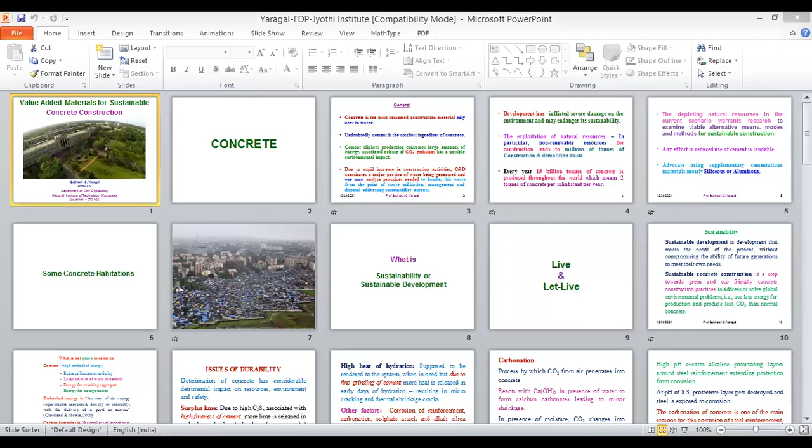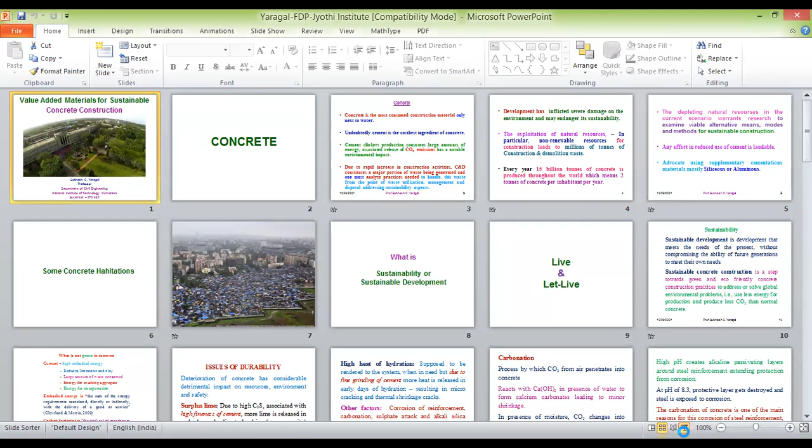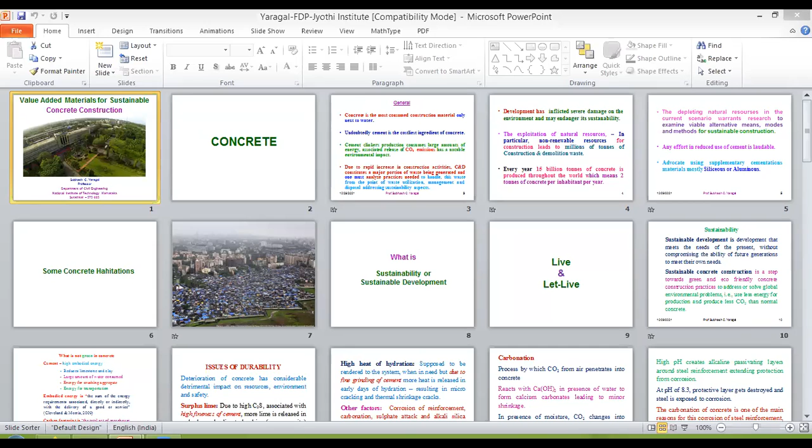Is that fine now? Is it okay now? No, sir, I think you have to click on this small icon for full screen slideshow. It's just beside 100%, in the bottom right corner. Just click on the slideshow. The fourth icon, sir. Not yet, sir. One minute. Should I give this new share? Yeah, sir, I think it's better if you share the whole screen rather than the PPT window. You can stop sharing and share again with your whole laptop window. Yeah, one minute.

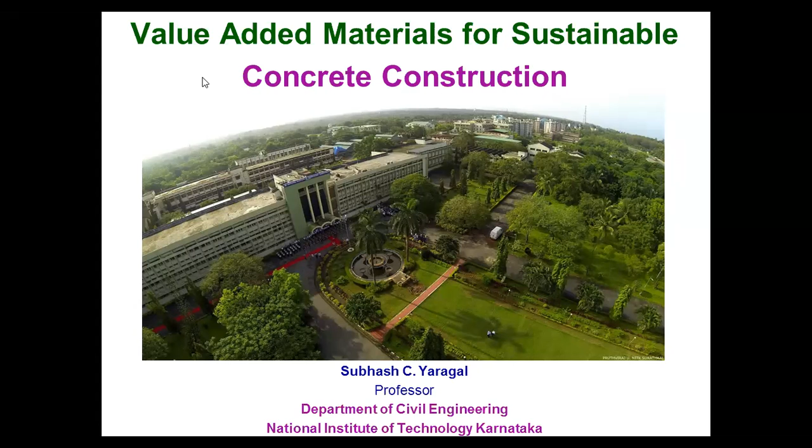Is it coming now? Hello? Sir, it's good to go. It's fine now? Yes, sir. Please go ahead, sir. Thank you. Sorry for the glitch that we had. No problem, sir.

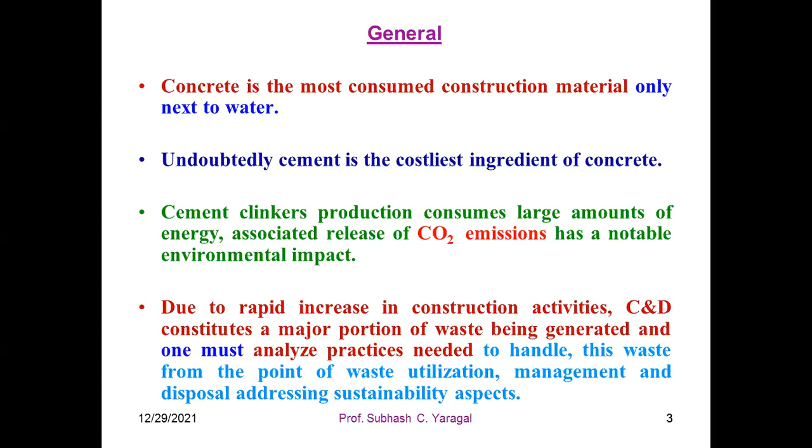There is no doubt that development has inflicted severe damage on the environment, and therefore we fear that it may endanger sustainability. Sustainability is in question, and therefore today's topic has a lot of significance: how to make concrete construction sustainable, so that future generations will also have adequate resources to enjoy to the extent that the current generations are enjoying. That is the theme of my presentation.

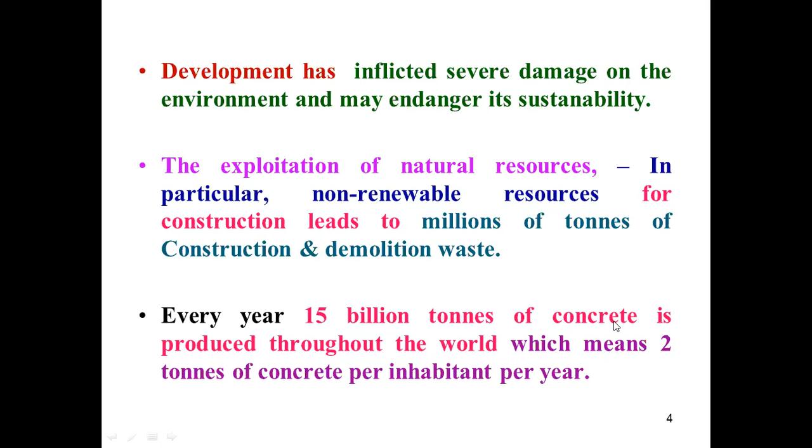The exploitation of natural resources, in particular non-renewable resources for construction, has led to millions of tons of construction and demolition waste. We have generated a lot of C&D waste. This statistic is very important. Every year, 15 billion tons of concrete is produced throughout the world, which on average means 2 tons of concrete per person per year. So you and I are producing around 2000 kg per year. That is not C&D waste; it is the per capita concrete generated, which is not a small amount.

Now, the depleting natural resources in the current scenario warrants or is the need of the hour to do research to examine what are the viable or feasible alternative means, modes and methods for sustainable construction. So warrants means it is a serious requirement today so as to address sustainable construction.

Therefore, any effort in reduced use of cement is very appreciable. We normally, to do this, advocate or preach to use more supplementary cementitious materials, which could be siliceous or aluminous.

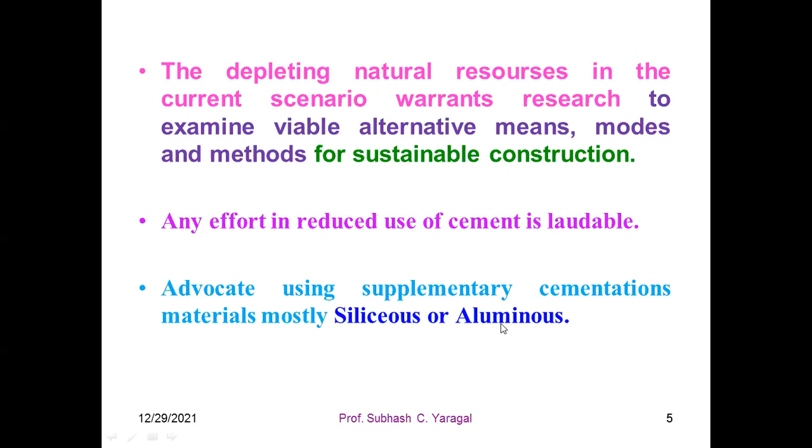So if you look at some concrete habitations all over the world, this is a photograph from Mumbai, close to the Mumbai airport. We are having a concrete jungle. Here also people dwell and live, as the richer class of people are living in multi-story buildings.

So why I have taken this slide is just to show that sustainability is all of us should have the same living standards, but it is not so for whatever reasons. So there is a gap between the rich and the poor. In the years to come, this gap has to be reduced.

What is sustainability or sustainable development? Very simple. Father of the nation, Mahatma Gandhi said, live and let live. Already I said, if your future generations have ample resources to enjoy the life that the current generations are having, that means we are living our lives and also allowing the future generations to live. So the simple definition of sustainability is you also live and allow others also to live.

I'm just coming to the core of my presentation. We'll just see what sustainability is and what is sustainable concrete construction.

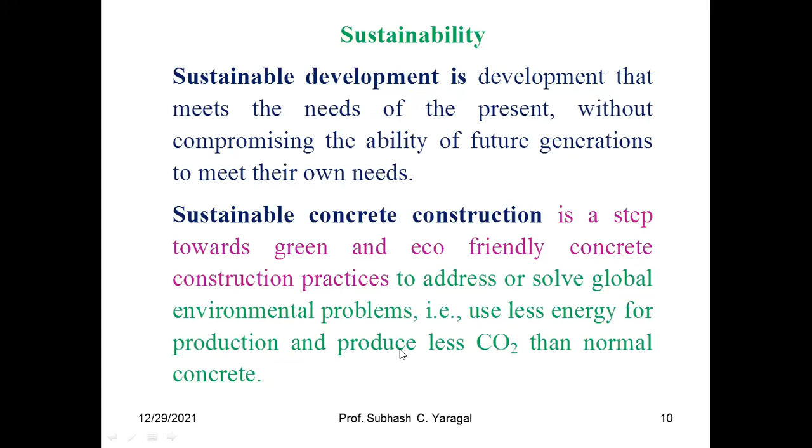If you ask me what is not green in concrete, the first culprit happens to be the cement. And cement is a binder for the constituents of concrete. So it itself is not a green one.

Why? Because for cement production, we require high embodied energy. It is a very energy intensive manufacturing process involved to produce cement. There, to produce cement, we are reducing the natural deposits of limestone and clay. A large amount of water is consumed in the manufacture of cement.

Energy is needed for crushing aggregates, because whatever limestone and clay deposits are to be crushed, you consume mechanical and electrical energy. Of course, manufactured cement has to be transported to the place of use, therefore you consume a lot of energy for transporting cement from one place to the other.

We'll define what is embodied energy, because I wrote here high embodied energy, and what is carbon footprint. These are the two buzzwords as regards global climate change and sustainable construction. Embodied energy is the sum of the energy requirements that is associated either directly or indirectly with the delivery of a good, for supply of a good, or it could be a service.

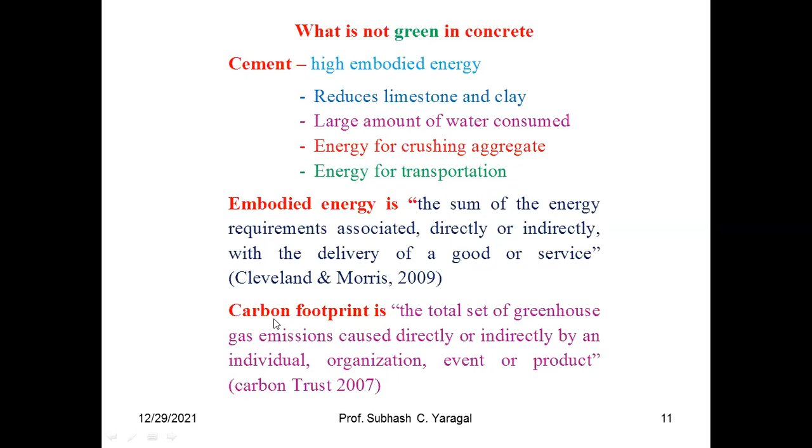Why am I talking about the issues of durability? If your concrete is not going to be durable, it means it calls for replacement sooner and sooner. So our effort should be to increase the durability of our construction material, or make concrete as durable as possible. Now, what are the issues with making it highly durable?

It is the deterioration of concrete. So concrete's quality is deteriorating with time. This has a considerable detrimental impact on resources, because if it gets deteriorated, again you have to make use of the natural resources for producing new concrete.

That calls for threat to the environment, and it is indirectly a threat to the safety of producing resources. Therefore, deterioration in concrete should be reduced so as to increase the durability of concrete. Make your concrete live as long as possible without having any detrimental effect.

We'll see what are the issues related to durability. One is surplus lime. Please understand, due to high C3S, which is associated with high fineness of cement - finer the cement, more is the production of C3S, one of the constituents of hydration of cement - more lime is released in early days, which leads to leaching. Leaching means this lime would like to come out of the body of your concrete. So if this leaches out or tries to come out, it is making the body of concrete more porous, increasing the porosity of the concrete element - structural element could be a beam, column, or slab. So you are making that more porous, and therefore it becomes more prone to external chemical attacks. If your foundation is buried, chemicals in the soil may get into the body of concrete and thereby reduce the durability of concrete. That is my concern due to surplus lime.

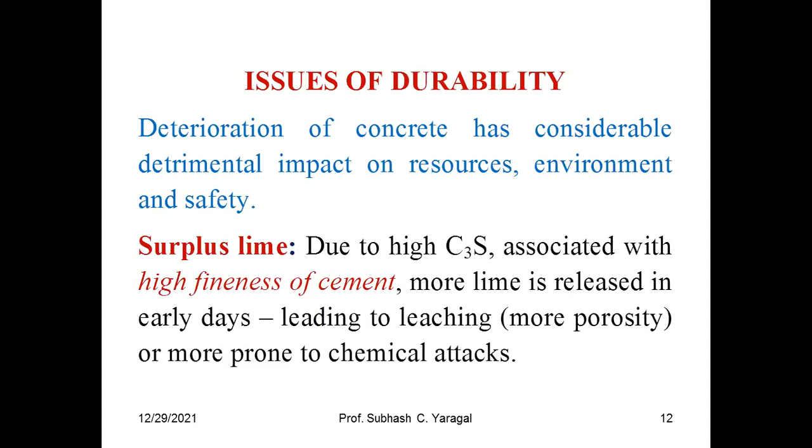We have problem with high heat of hydration, which is supposed to be rendered or delivered to the system when needed. But due to fine grinding of cement, which is the advanced technology for grinding, more heat is released in the early days of hydration. That results in micro cracking and thermal shrinkage cracks. This also has to be duly taken care of so as to increase the durability of concrete.

What are other factors? There are several other factors such as corrosion of reinforcement, carbonation, sulfate attack, and alkali silica reaction in concrete, which are the major issues associated with durability of concrete.

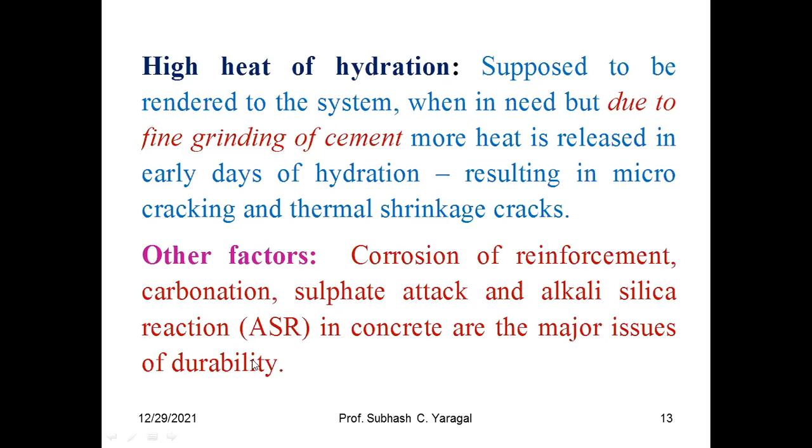Let's quickly see what carbonation is. You must all be familiar with carbonation. This is the process by which carbon dioxide from the air or atmosphere penetrates into the concrete or structural element. That we call carbonation - entry of CO2 from the atmosphere into the body of concrete. Now what does this do? It reacts with calcium hydroxide in the presence of water to form calcium carbonate, leading to minor shrinkage. This is the cause of entry of CO2.

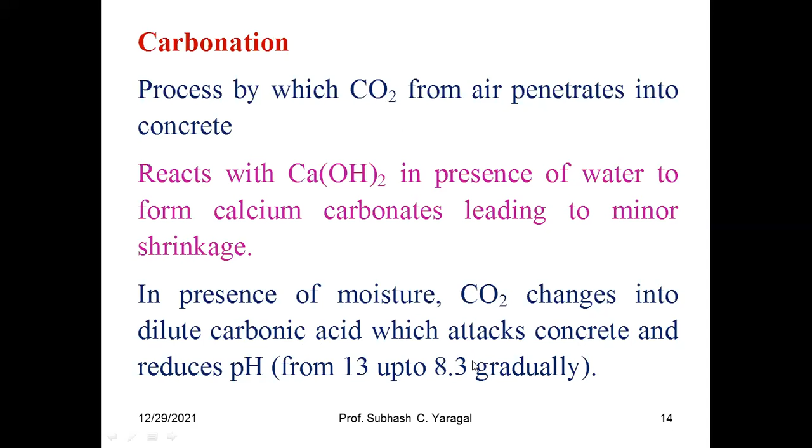In addition to that, in the presence of moisture, CO2 changes into dilute carbonic acid. This is of more concern, as it attacks concrete and reduces the pH from 13 - we want the concrete to be alkaline, up to pH 8.3. Due to this carbonation, the pH is getting reduced, from alkaline environment to acidic side, due to which our durability is again in question.

So high pH creates alkaline passivating layers, which are desired around the steel reinforcement, so that steel does not get corroded, extending protection from corrosion. We want an alkaline environment, but since the pH comes down from 13 to 8.3 due to carbonation, the protective passivating layer gets destroyed and steel is exposed to corrosion. So the chances of steel getting corroded due to carbonation are very high. Carbonation of concrete is one of the main reasons for corrosion of steel reinforcement.

This is particularly severe in high humid conditions like coastal Karnataka, where humidity is 50 to 70%, and in places like Mangalore and Surathkal, humidity is to the extent of 95%. So if we are not very careful in checking the effect of carbonation, the structural steel will deteriorate very quickly, and the structure may be in distress, manifested by cracks, and we may have to do early retrofitting or rehabilitation of the structure.

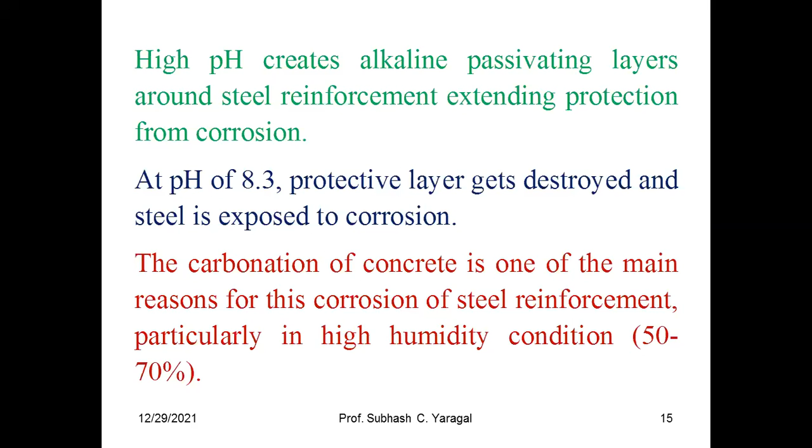What are the issues, concerns, and ways forward? Having understood the problem with making concrete durable, and also how to reduce the consumption of cement, which is the only constituent in concrete that is not green.

Now, global effort towards sustainability - a lot of effort has gone in, starting from the year 2007, issued by the International Panel on Climate Change, which has stated in no uncertain terms that global warming is no longer an issue to be debated. IPCC said that we are having global warming, we are not going to debate on that. Since global warming is here, drastic actions are needed for long-term sustainability of our environment.

So what we understood, or what the International Panel on Climate Change agreed, is there is global warming and we have to act swiftly, or very drastic actions are required if we are addressing the problem of long-term sustainability. If you do not want sustainable construction, you need not bother, okay, and your future generations are at stake and they may suffer.

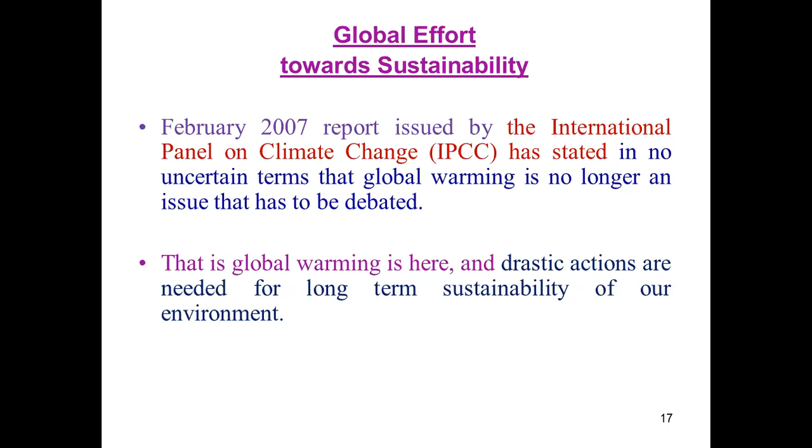Now, as per this International Panel on Climate Change, it consisted of 600 scientists from 40 countries. The global warming is here and is due to human activity and is irreversible. It is due to us and it cannot be repaired. But it can be reduced. It recommends drastic steps to reduce CO2 emissions, which is the primary source of global warming.

We'll talk about greenhouse gas emissions. It is not only carbon dioxide. Other greenhouse gases are also there. I'll address that.

If no actions are taken to curb or reduce CO2 emissions, it is likely that the Earth's average temperature could increase by 4 degrees by the end of this century. So please remember, a 4-degree rise calls for very serious attention. Temperature rise of 4 degrees C over this century and above, if it can be more than this, would have serious impacts on food production, water availability, and extreme weather events worldwide.

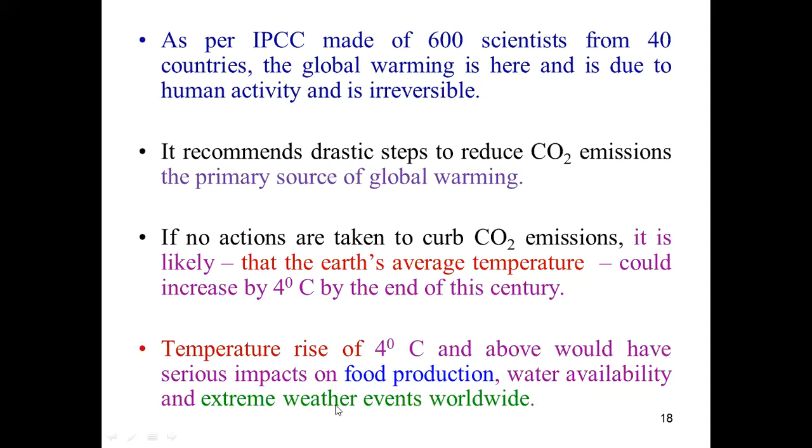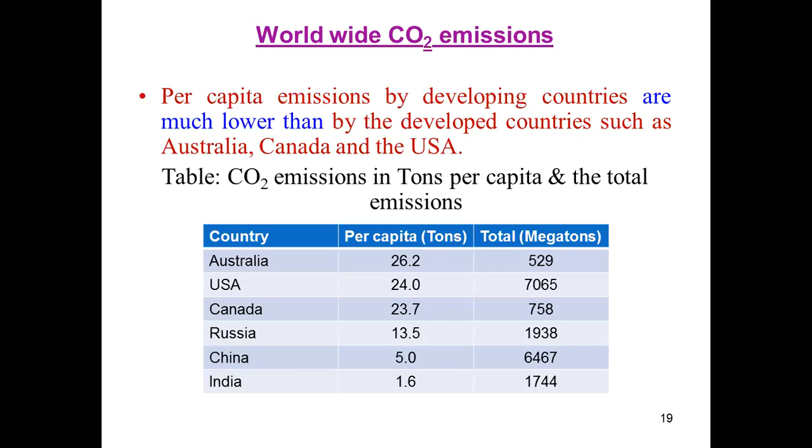Now, worldwide CO2 emissions per capita in developing countries are much lower than the developed countries such as Australia, Canada, and US. Okay, this is the data for your information. I'll share this PowerPoint presentation, and you can go through these details.

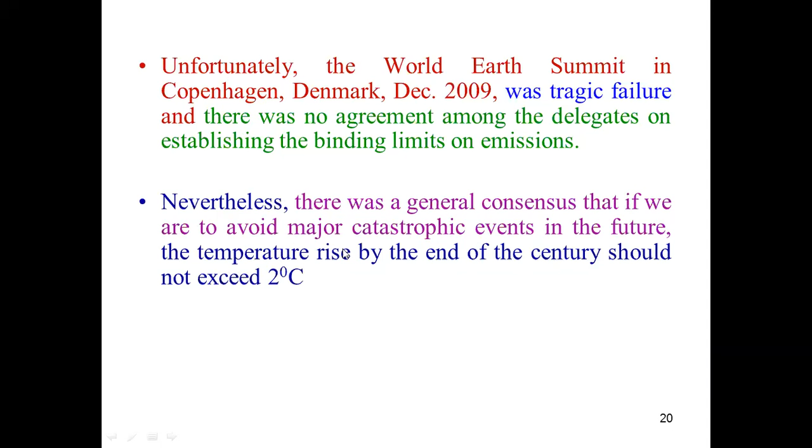Now, unfortunately, the World Earth Summit in Denmark in the year 2009 was again a tragic failure, and there was no agreement among the delegates or the participating countries on establishing binding limits on CO2 emissions. However, nevertheless, there was a general consensus that if we are to avoid major catastrophic events in the future, the temperature rise by the end of the century should be contained or should not exceed 2 degrees C. So this was the understanding in 2009.

Now, CO2 emissions by automobiles in USA. Cars are the largest single source of emissions into the atmosphere, and every liter of gasoline burned produces about 2.5 kg of CO2. The average car getting 10.6 kilometers per liter and traveling 20,000 kilometers per year emits about 4.7 tons or 4,700 kgs of carbon dioxide. Just to give you a feel, one car which runs 20,000 km per year with this mileage is giving you around 5,000 kg of CO2 into the atmosphere, just to give you a feel.

Now, CO2 emissions and tropical deforestation. So this also is a worry for us. This is the second biggest cause for global climate change, deforestation, second only to burning of fossil fuels. Now, because of deforestation, Indonesia and Brazil rank third and fourth in the world in greenhouse gas emissions. Of course, first and second are China, which is highest in these greenhouse gas emissions, and America.

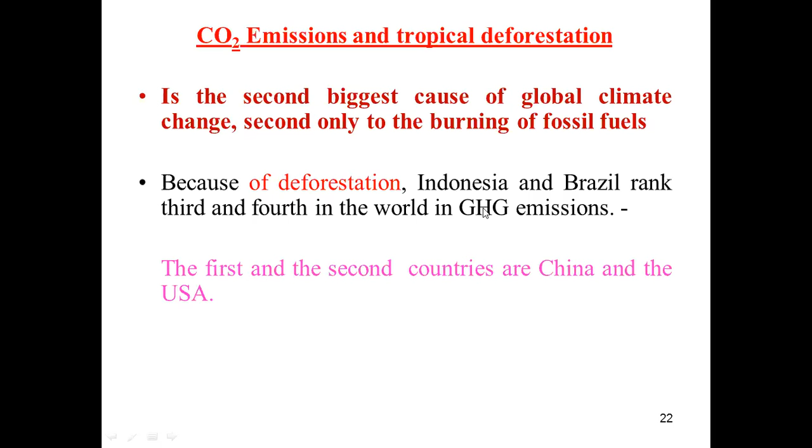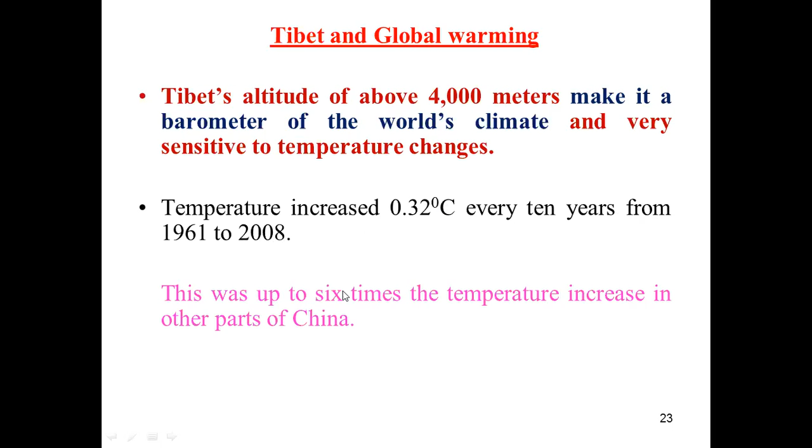Now, the importance of Tibet as regards to global warming. Tibet's altitude is around 4,000 meters above mean sea level, and it is called the barometer of the world's climate. So Tibet is very sensitive to this global warming, okay, and is sensitive to temperature changes. The temperature has increased 0.32 degrees every 10 years. That means in 30 years, it is close to 1 degree C, from the year 1961 to 2008. So this was up to 6 times the temperature increase in other parts of China. So elsewhere, it is almost 6 times.

So what? We are going to pay a heavy price, the likely outcome of climate change. Global warming is going to bring in climate change. Now, because of this, we are paying the price for the following: disappearance of glaciers, okay, that means glaciers are melting very fast, melting of the Antarctic glaciers, and melting of the permafrost in the north.

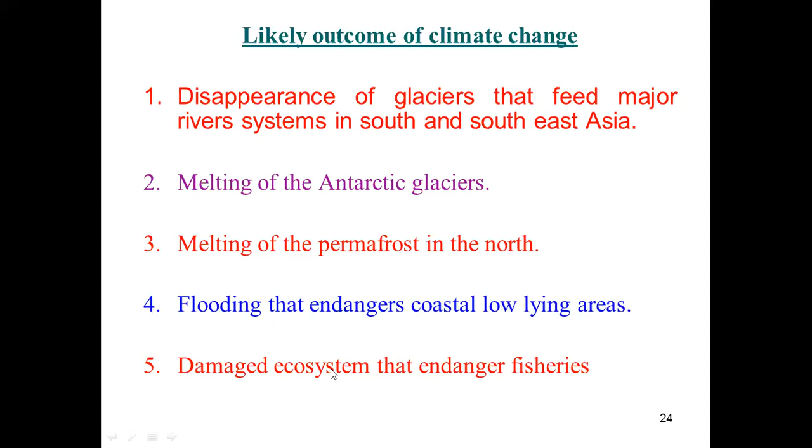Due to disappearance of glaciers, we may have flooding that endangers the coastal low-lying areas. So if the water, because of the sea level rise, starts to come inland, all the low-lying area people have to get inland. Okay, so you will have flooding. You are having damaged ecosystem that may endanger fisheries. So fisheries is our food production. So if you damage the ecosystem, your food production has a direct impact.

You may have danger of very serious air pollution. We are seeing this now. We have not really understood, but because of the global warming, you are having climate change. Because of climate change, you have danger of serious air pollution. You may have increased danger of insect-borne diseases. Not clear about, but you are likely to get this.

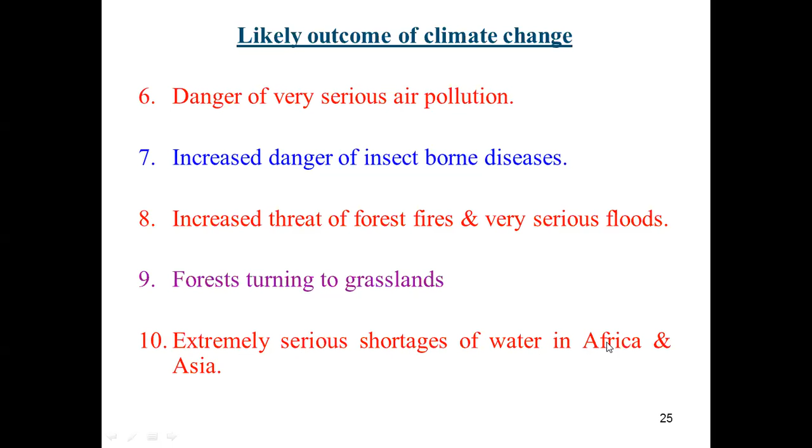You will have increased threat of forest fires and very serious floods. Forests turning to grasslands, that is, fertile land becoming barren land. Extremely serious shortages of water in both Africa and Asia. Already we are experiencing this.

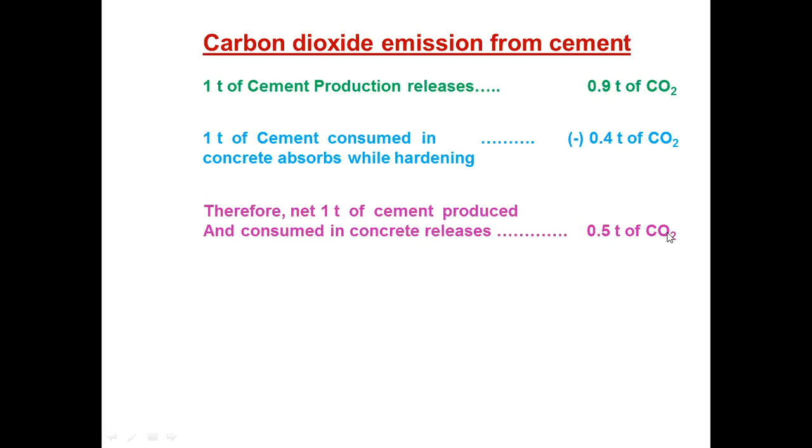Okay. Again, I'm coming back to CO2 emissions in the manufacture of cement. 1 ton or 1000 kg of cement production releases 900 kg of CO2. We have a rough understanding that the concrete itself is going to absorb back, while it is hardening, about 400 kg of CO2 back into its body. So net, if you produce 1 ton or 1000 kg of cement, at least you are responsible that you are letting off 500 kg of CO2 into the atmosphere, just to remember.

Enormous emission of CO2 into the atmosphere, along with minor amount of nitrogen oxides, we say NOx, and methane. These are also deadly. Now, NOx, oxides of nitrogen, and methane, though they are small, are much more damaging than carbon dioxide. So all this time we are talking about only CO2. So greenhouse gas will also have these.

So I have just given the relative damage indices for various greenhouse gases. If you consider CO2 damage as 1, methane is 20 times dangerous than carbon dioxide. Nitrous oxide is 200 times dangerous than carbon dioxide. And fluorine, though small, is 15,000 times damaging than CO2. Of course, CO2 we are producing in large amounts.

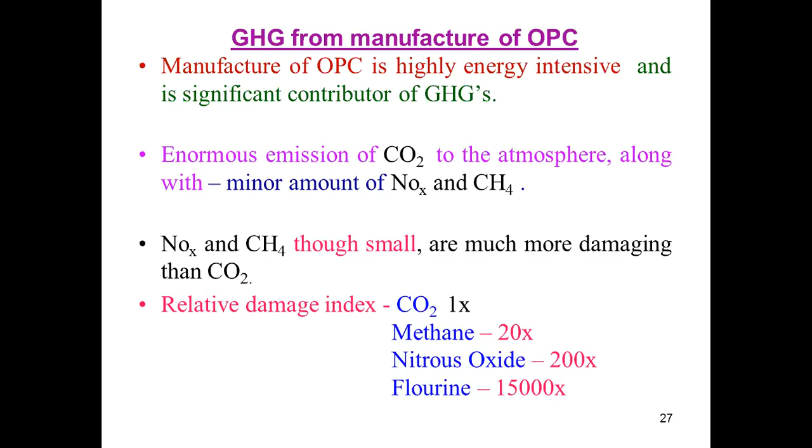After that, to address sustainability, the other constituent which is so vital for existence of all living organisms, including human beings, is water. So water will be the next world's crisis. Okay, we'll run short of water. Now, water shortage again has an implication on global warming. Himalayan glaciers are melting fast. Glaciers are retreating by about 10 to 15 meters each year, not a small melting.

This is on one hand. On the other hand, there are a lot of luxuries. We are wasting a lot of water, to the tune of 9.5 billion liters of water currently being used for irrigating world's golf courses. So golf is itself a luxury and you are consuming large volumes of water.

Irrigation, we are paying a lot of price because our conveyance, our irrigating canals, are not efficient enough. So efficiency of water transport from the dam site to irrigate fields is only to the tune of 50 to 60%. That means during transportation of this irrigation water, we are losing about 40 to 50% of the water. Water table is very fast declining because you are over exploiting the groundwater. There are no well set drafting laws in place.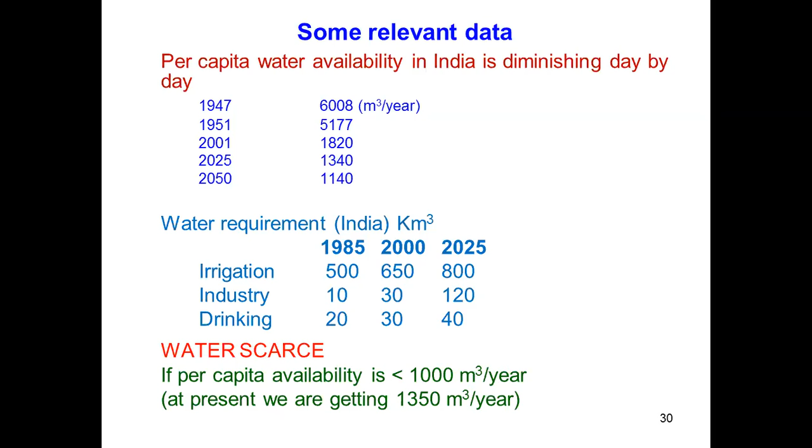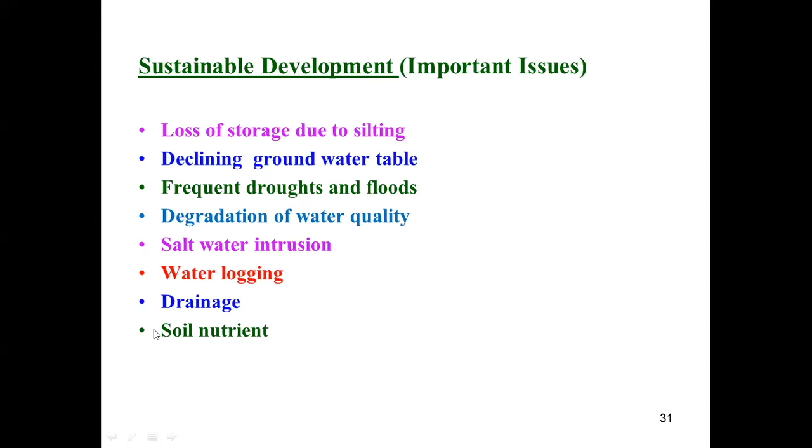You may have waterlogging if drainage conditions are not properly maintained. So drainage has to be addressed. Soil nutrients are lost, again, if there is no proper drainage. What are remedial measures? Very important. I'll just touch upon them. These are all not new to all of you who are listening to me now.

Conjunctive use of both surface water and groundwater. So you strike a compromise, how much of the surface water you are going to use and how much of groundwater you are going to have. Most of you who have bore wells, the government or the state authorities or the local bodies never tell you how many liters of water you have to pump out for irrigation or drinking. So there are no rules, and therefore groundwater is being exploited.

Therefore, you must have an effective draft operation policy. Government should bring in a policy depending on the need, how much of the groundwater I can pump out per day or weekly basis, whatever it is. So you have to go for a judicious use of both surface water and groundwater by having a draft operation policy. Try to improve the irrigation efficiency, because in transporting irrigation water, water is lost on the way.

Try to restore minor tanks and ponds. Government has already initiated this, it has to be encouraged. Interlinking of rivers if possible. Recycle and reuse the materials, which I'm now talking about at least as regards concrete. Demand management has to be done. If there is a need, then you have to supply. If there is no need, then you need not supply. Rainwater harvesting is the answer. Interbasin transfer, if it is viable and feasible.

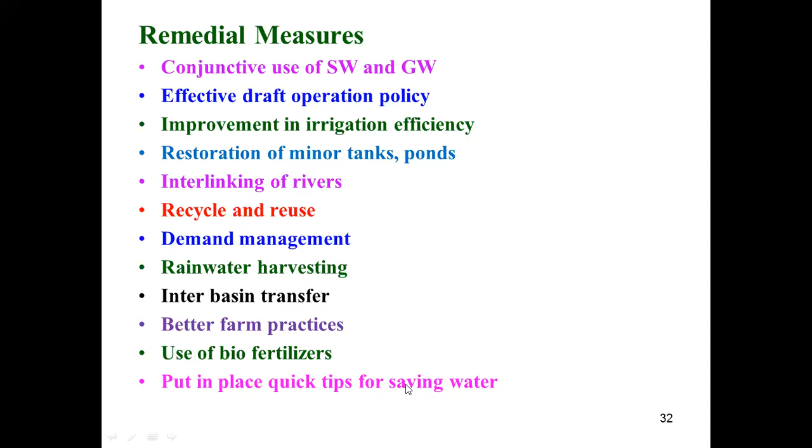Go for better farming practices. Most of our agriculture activities can be mechanized, efficiency can be increased. Use biofertilizers. Organic farming has come into the picture, it has to be increased. Put in place quick tips for saving water. All of us as individuals can save water, which is very precious. If we don't act today, our children and grandchildren in the years to come will suffer because of our misconduct. So consume only as much as required.

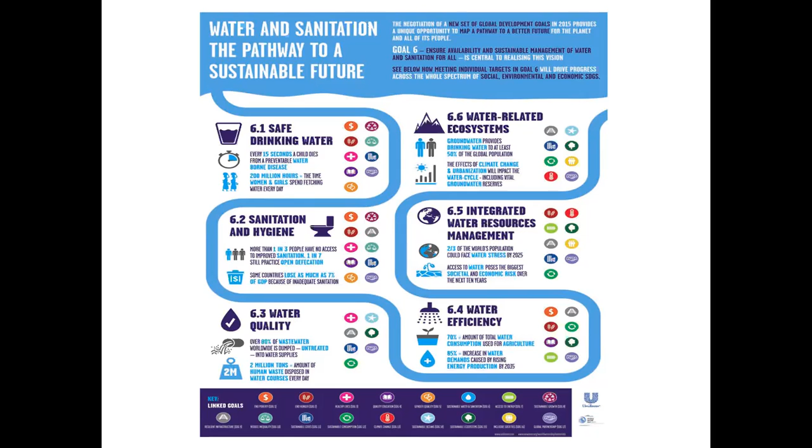Now the efforts from the United Nations organization: they celebrated 2005 to 2015 as the water decade. What they have done is, water and sanitation is the pathway to a sustainable future. From this document, I have taken one slide. This is an 800-page document because the efforts of 10 years have gone into this text. It addresses safe drinking water. So this is the gist I'm talking about. It talks about sanitation and hygiene, cleanliness, water quality, water efficiency, integrated water resources management, water related ecosystems. So this is what the United Nations organization has done from 2005 to 2015. They have celebrated these 10 years as the water decade.

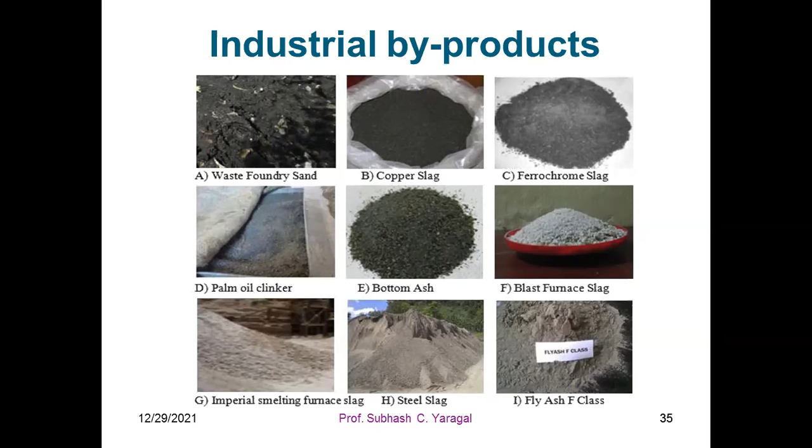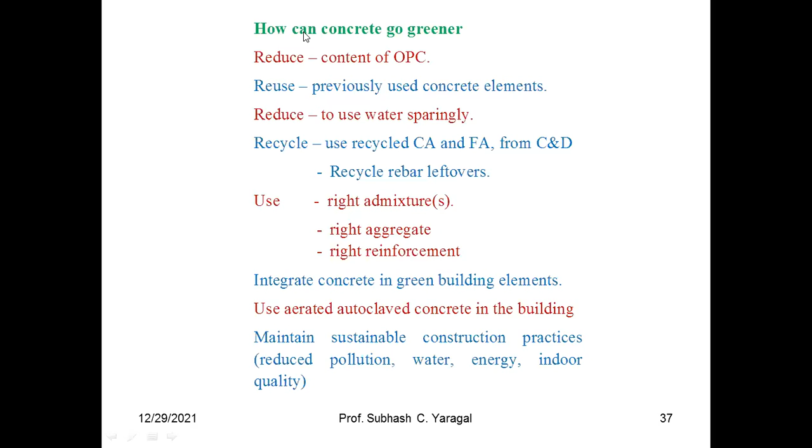What is the way ahead? How can we make concrete go greener, or more eco-friendly? We have to reduce the content of OPC in production of concrete. The lesser the OPC consumed, the greener you are making concrete. Try to reuse previously used structural elements. That means your construction and demolition waste has to be reprocessed and reused to the extent possible.

Reduce consumption of water because it is very precious, and use water sparingly whenever required. Try to recycle: use recycled coarse aggregates and fine aggregate from construction and demolition waste. Again, try to recycle the rebar leftovers, whatever is left out, please try to recycle.

Make use of right admixtures. We have a lot of construction chemicals for increasing the performance of concrete. So go for right use of admixtures and right aggregates, because the right aggregates will give you good concrete, and good concrete will become more durable. Similarly, right type of reinforcement will increase the life of the structural element, and therefore your concrete element will last longer.

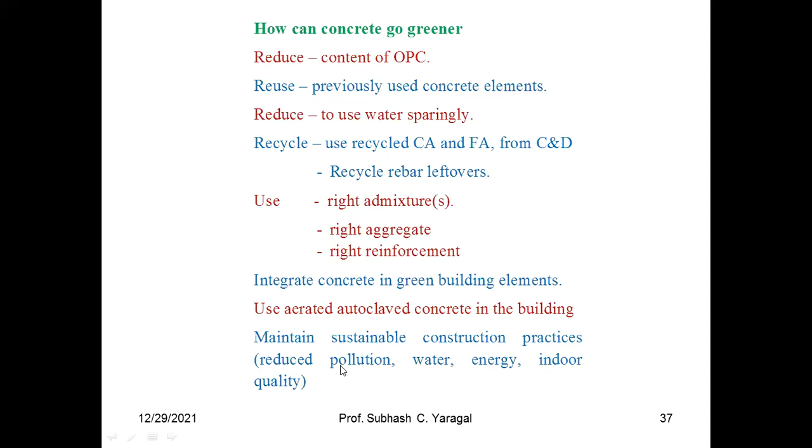So we are talking about blended cements because we have produced Portland pozzolanic cement, Portland slag cement, and Bureau of Indian Standards has come out with composite cements where you have both fly ash and also granulated slag. Both are industrial byproducts. They are no more waste, but they are both value adding to the clinker. So you are only consuming less of the clinker deposit, whereas bringing in these two along with gypsum to delay the setting times. So this is a recommended composite cement, which at least to the tune of 85, if you look at the upper limit, we are getting rid of our normal OPC for concrete production, for cement production.

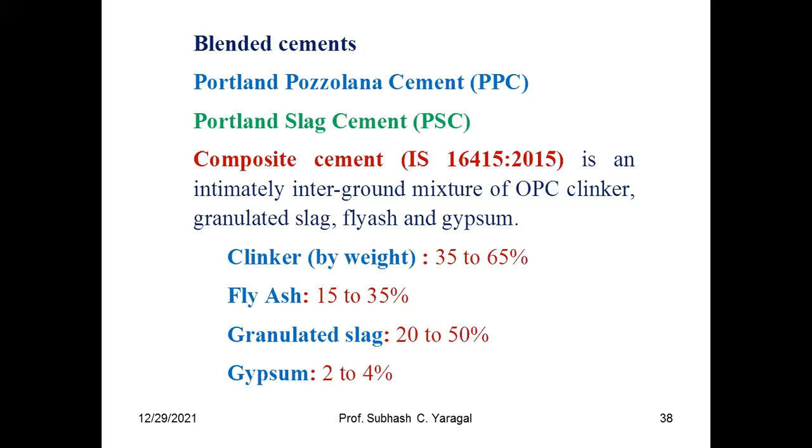Now, production of coal ash bricks also as building blocks has been in place and should be encouraged. Innovative concrete products. So this is from Master Plannery, a place near Puttur in Mangalore. So these all look like wooden fencing, but they are all concrete wood. You have concrete benches, garden terracing, and all these are available. So these are products which have to be encouraged.

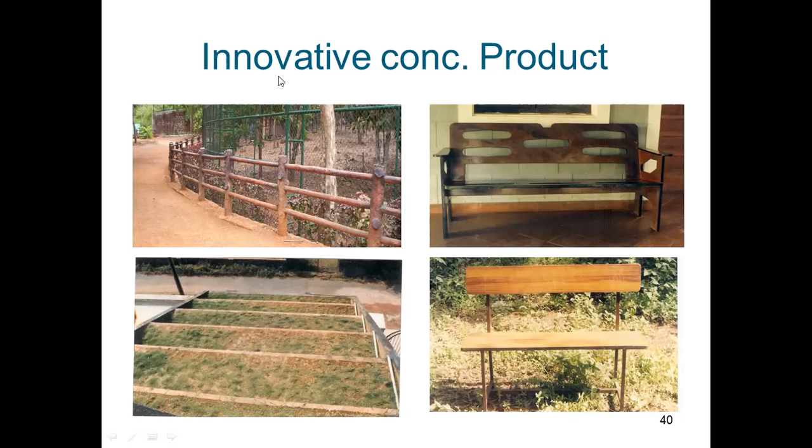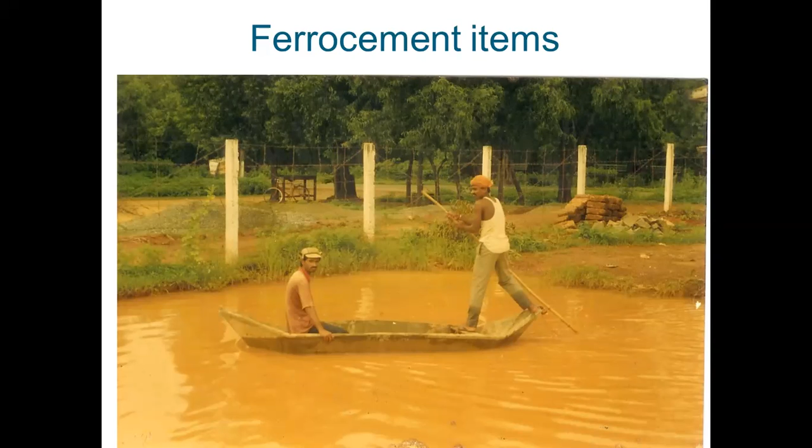This is a ferrocement boat, which was made in NITK Surathkal in the year 1980. What is the beauty of ferrocement products? Ferrocement items are going to last longer in the years to come. So we should encourage them, because you just simply take chicken wire mesh and make use of rich cement mortar. So you get very light and very strong structural elements made out of ferrocement. We have not exploited ferrocement. I think in the years to come, your precast ferrocement structural elements have to be popularized.

Some research efforts I would like to address here. We have gone for lateritic sand. We have done characterization, because a lot of laterite blocks are being used in coastal Karnataka, where we have large deposits of lateritic sand. During the manufacture of all these laterite blocks, you have a lot of waste lateritic soil, and we have already published. We have established a procedure of characterizing this, which is a substitute to river sand.

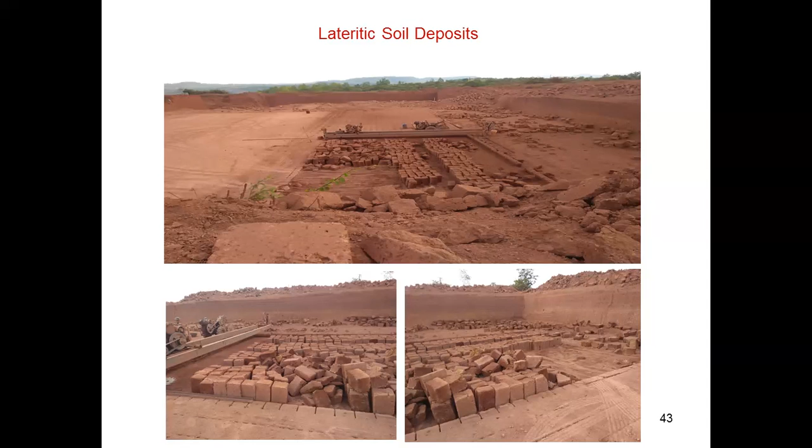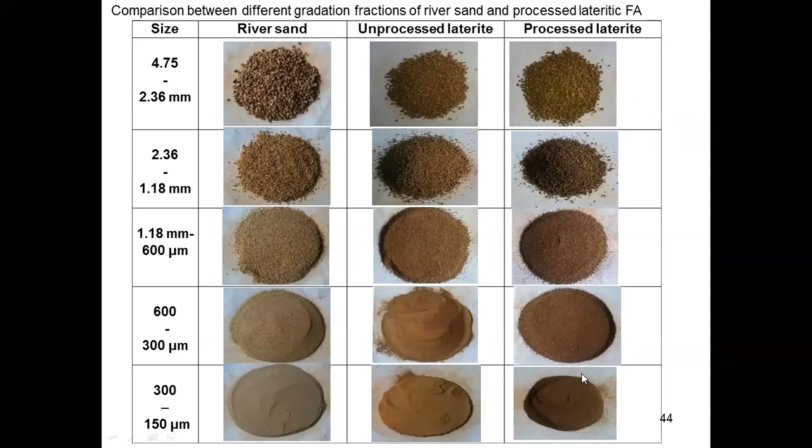So if you look at the quality of lateritic sand, it is here. This is your natural river sand, this is unprocessed lateritic sand and processed lateritic sand. Similarly, we have gone for production of coarse aggregates from the construction and demolition waste. This also we have published.

And we have done a lot of work on using recycled plastic waste. Plastic waste that is melt processed. We have tried to use these pellets, we will see how they are manufactured, as filler material, both in concrete and mortar. These melt processed materials can also be used as fibers in concrete.

We have done a lot of work on using broken Mangalore tile as coarse aggregate in concrete. We have done the studies for normal and pervious concretes. We have tried to use it as fine aggregate in concrete and mortar. Also, broken Mangalore tile waste is used as a supplementary cementitious material, pozzolanic material. It is rich burnt clay, and it should not go as waste, so we are trying to use it as coarse aggregate, fine aggregate, and also as pozzolanic material.

Apart from this, we have done studies to use waste EPS products, this packaging material, also as coarse aggregate in concrete and also fine aggregate in concrete and mortar.

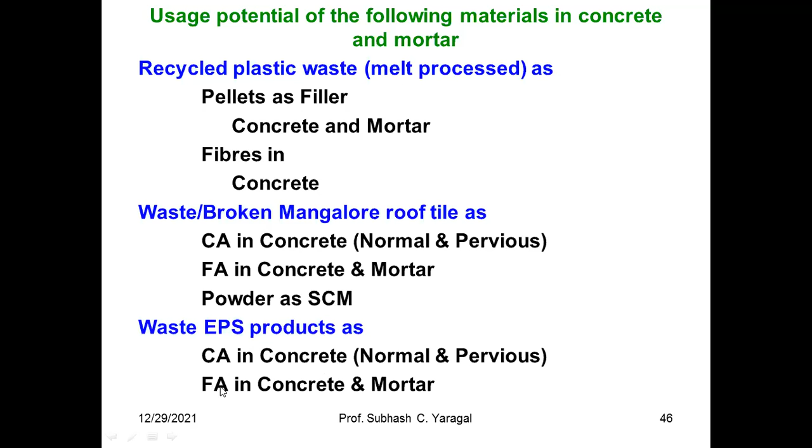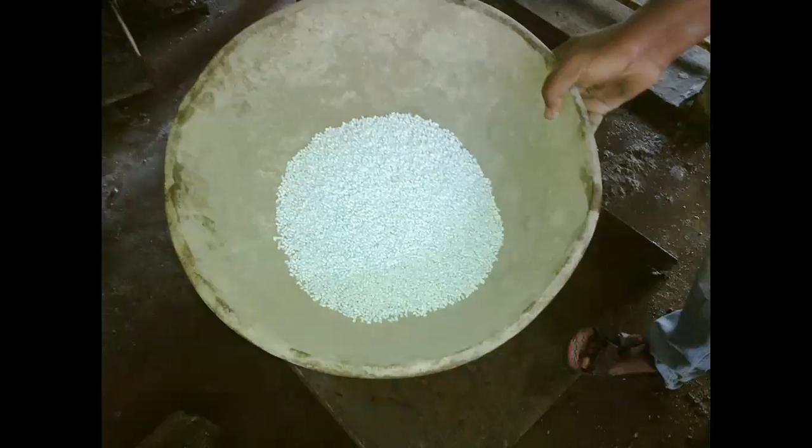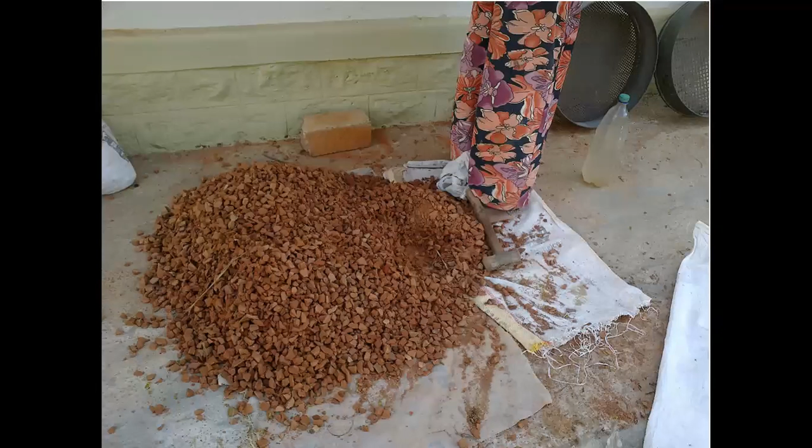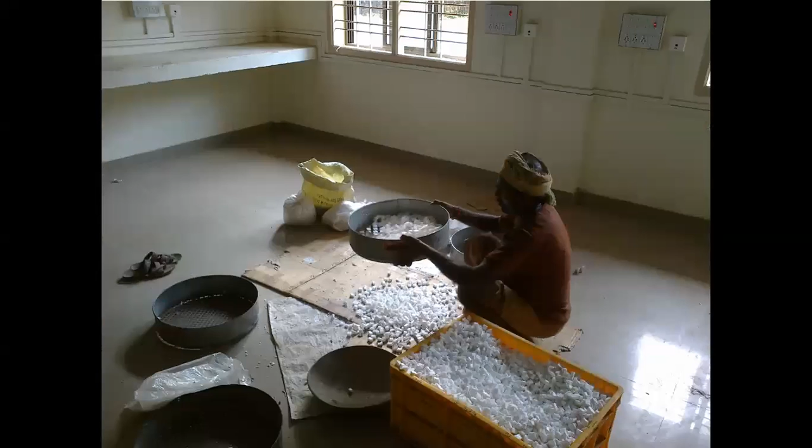Yeah, Mangalore tile waste can be processed into coarse aggregate, fine aggregate, and also cementitious material. Okay, this is a fine, rich clay powder having cementitious properties. Packaging materials can be cut into pieces. We have done studies on this. Okay, both as replacement for coarse aggregate, not full, part replacement.

And these products can be appropriately used, not for structural concrete, for concrete which is of inferior quality but used for different purposes. It could be like maybe fence or compound walls, which are unimportant. They need not have to bear the very heavy structural load. Okay. How we can make cement industries contribute to reduction of CO2 emissions.

So these are my last concluding remarks. Try to use design mixes against the nominal mixes. Earlier we had nominal mixes, 1:1.5:3, 1:2:4, 1:3:6. Okay. But now you go for design mixes. Thereby you will use less fine aggregate. You will consume less cement. You will consume less coarse aggregate. Try to use less Portland cement is another step for sustainable concrete construction.

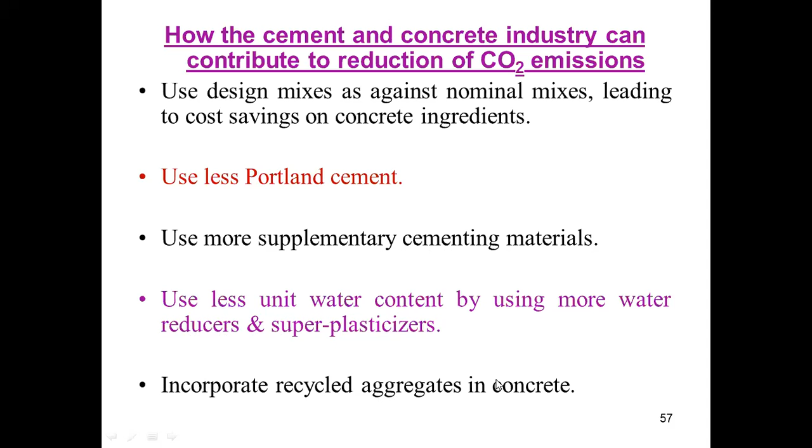Make use of more supplementary cementing materials. Use less unit water by making use of chemical admixtures and superplasticizers. Incorporate recycled aggregates in concrete, which is again a great step towards sustainability. Use stainless steel reinforcement only in critical parts of structures. Very important parts, you go for use of stainless steel. That makes the concrete or the structural element more durable.

Where possible, specify strength acceptance criteria on 56 or 91 days, that is 2 months or 3 months instead of 28 days. Because whenever you go for blending with fly ash and GGBS or metakaolin, any other cementing material, you have to allow it to gain strength slowly. Okay, because it is not going to be 28 days. So it is going to be either 56 days or 3 months. So strength gain is slower.

Use roller compacted concrete for pavers and gravity dams. Use lightweight concrete wherever possible. Develop your self-compacting concrete using large volumes of fly ash. You consume more fly ash as much as possible. Design for durability instead of strength. This already is in place because we have revised IS 456, which addresses both strength and durability. Earlier, we were only talking about strength, but durability of concrete also is equally important.

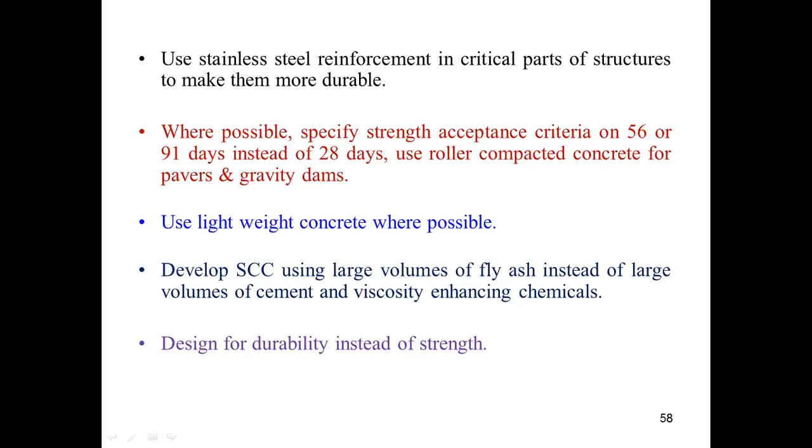Go for pervious or porous concrete as much as possible. Advocate or use geopolymer concrete to the extent possible. You know, geopolymer concrete is also called cementless concrete. Adopt alternatives to river sand such as processed locally available soil. I talked about lateritic soil, or industrial byproducts like copper slag, iron ore tailings, bottom ash. Lot of substitutes are there. Please try using them as substitute to river sand. Use as little water as possible and try to recycle water. Thereby your water consumption will decrease.

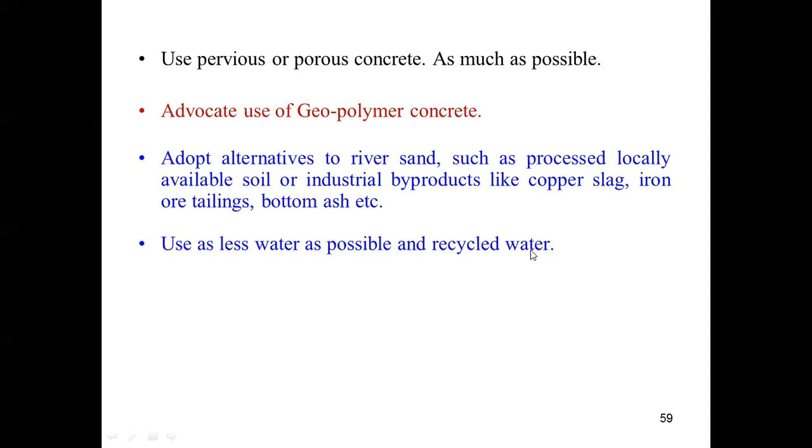I think that's all I wanted to share. Before I close, I just share a prayer from Gitanjali by Rabindranath Tagore: where the mind is without fear and the head is held high, where knowledge is free, where the world has not been broken into fragments. Okay, stay united, don't get broken into fragments by narrow domestic walls. So don't think low or don't think mean and get fragmented.

Where the words come out from the depth of truth, where tireless striving stretches its arms towards perfection, where the clear stream of vision has not lost its way, you should know where you are heading to. You should not get lost into dreary desert sand of dead habit, where the mind is led forward into ever widening thought and action, into that heaven of freedom, my Father, let my country awake. So Rabindranath Tagore got the Nobel Prize for literature. So this is one of the poems from Gitanjali.